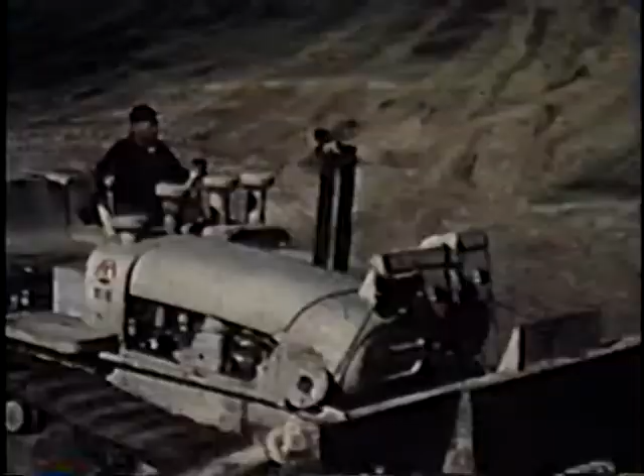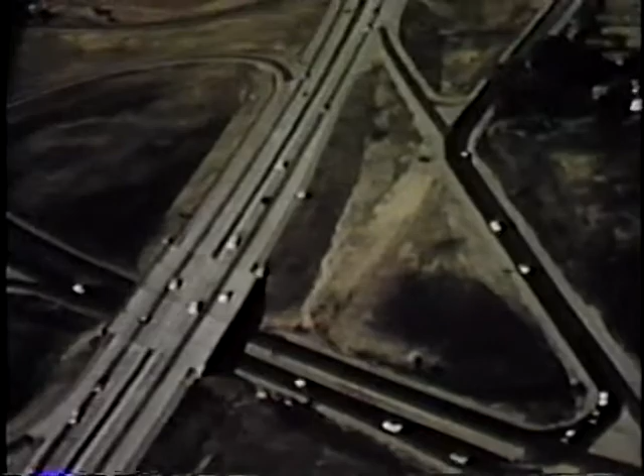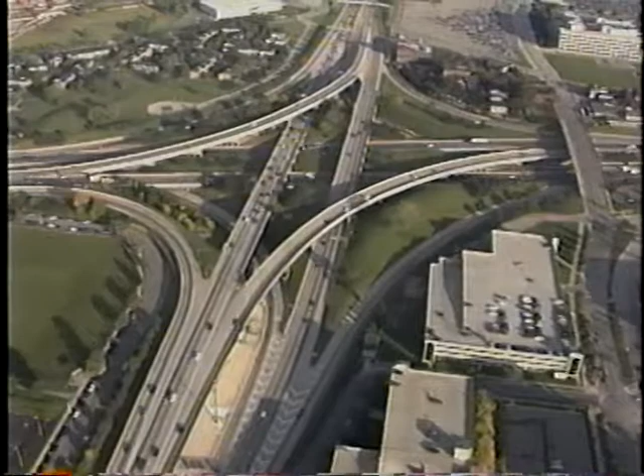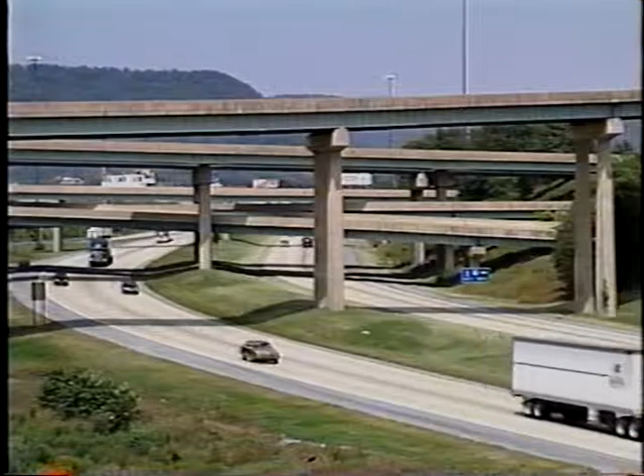It's been a massive undertaking, spanning 40-plus years, costing well over $100 billion, stretching from coast to coast. Ever since President Eisenhower signed the Federal Highway Act in 1956, the focus of transportation funding has been on construction. Our interstate and national highway systems are the largest public works projects in our country's history, achieved through a unique partnership between the states and the federal government, forming the foundation of our transportation infrastructure, the backbone of our nation's economy.

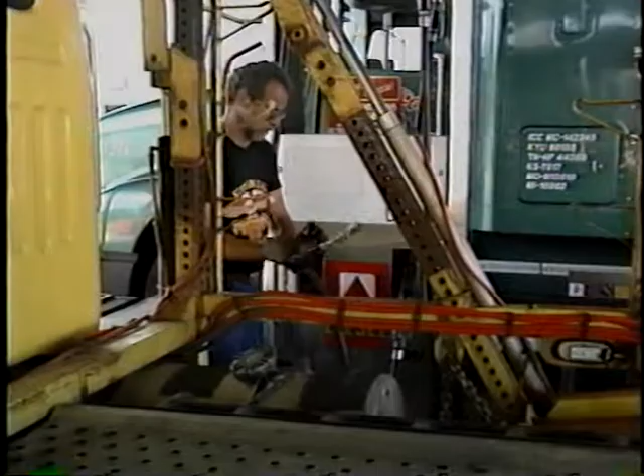Time, traffic, and nature take their tolls on our pavements as the demands on our highway network continue to increase dramatically. At the same time, operating funds have decreased significantly. Revenues simply don't keep pace with needs. In many cases, too, severe reductions in staff contribute to the burden and to the problem. For many years, the resources needed to sufficiently preserve our highway infrastructure have been underfunded. We now have needs that far exceed the resources available.

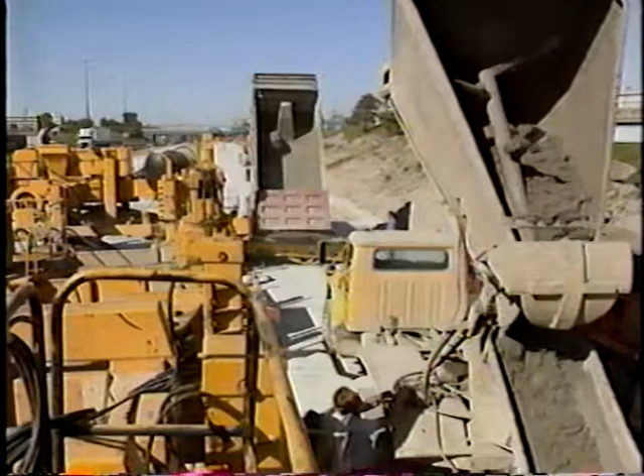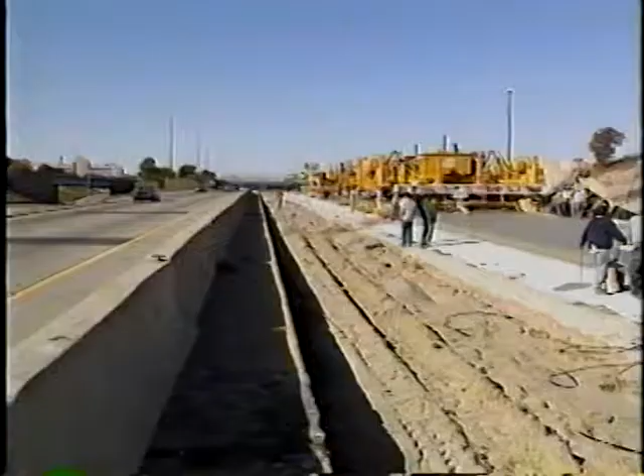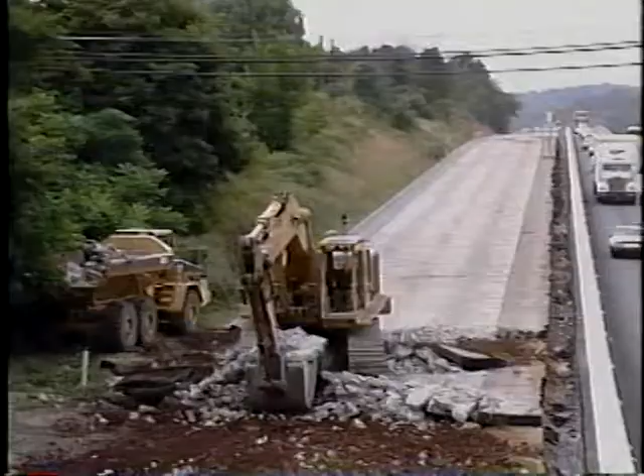The old philosophy of worst first meant directing funds to highways most in need of costly rehabilitation and reconstruction. Preventive maintenance has too often been delayed or neglected entirely, causing minor defects to become major ones, requiring more expensive repairs, disrupting traffic for longer periods of time, adding much higher costs and inconvenience over the life of the pavement. But the old philosophy is shifting to a new paradigm, protecting our pavements through preventive maintenance.

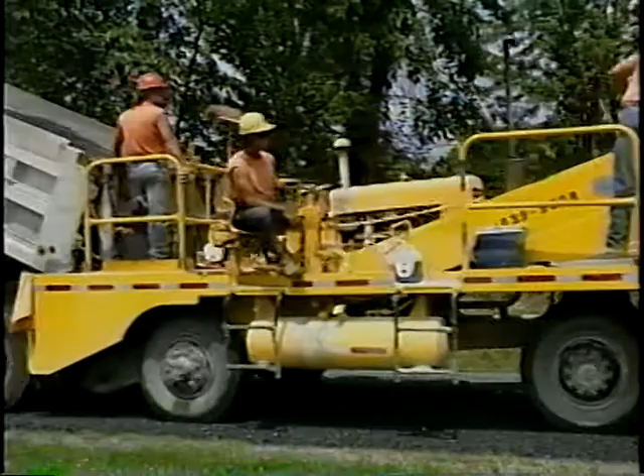One of our prime responsibilities is to maintain the investment we have in our transportation infrastructure. And the best way to do this is through preventative maintenance. Congress and the Federal Highway Administration are committed to the timely preservation of our highway infrastructure. As a result of amendments to the Intermodal Surface Transportation Efficiency Act, strengthened by changes to the National Highway System Bill, federal aid funds are available for cost-effective preventive maintenance programs. Preventive maintenance that extends the useful life of our transportation assets.

Every year we extend the useful life of a pavement or a bridge is a year that we don't have to make that large investment needed to rehabilitate or reconstruct. We can continue to provide a level of service our customers want and even demand with a smaller investment and less disruption to traffic.

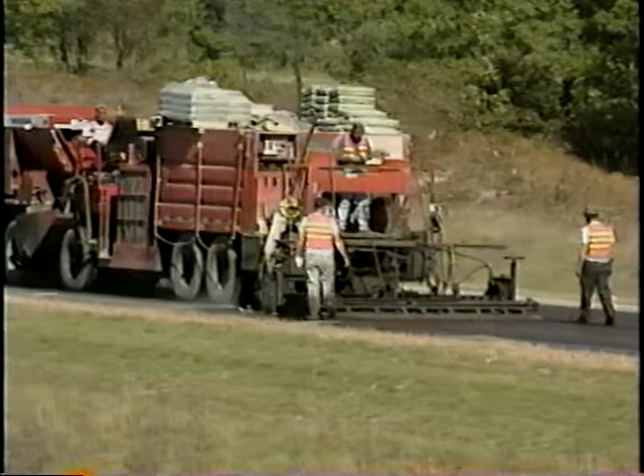Unlike reactive maintenance that works to correct a specific pavement distress, preventive maintenance is proactive, making the most of modern, cost-effective ways to preserve and protect pavement integrity. The goal is to keep the highway network at a given level of quality. And the benefit? Preventive maintenance decreases the rate of deterioration and can delay for years, maybe even indefinitely, costly reconstruction of pavements.

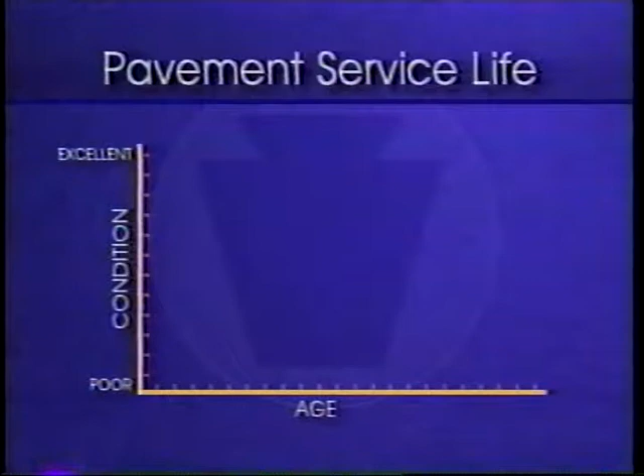Hello, I'm Gary Hoffman, Chief Engineer for the Pennsylvania Department of Transportation. Pavement deterioration of all types can best be represented by this characteristic curve. During the first portion of a pavement's useful life, the pavement is generally smooth and the rate of deterioration is slow. However, as the pavement ages and gets rougher, the daily pounding of heavy vehicles begins to take its toll. Surface cracks develop, water forces its way into these surface cracks, and the pavement deteriorates more rapidly. It is easy for just about anyone to tell when a pavement has reached the end of its useful life, represented on this chart by point B.

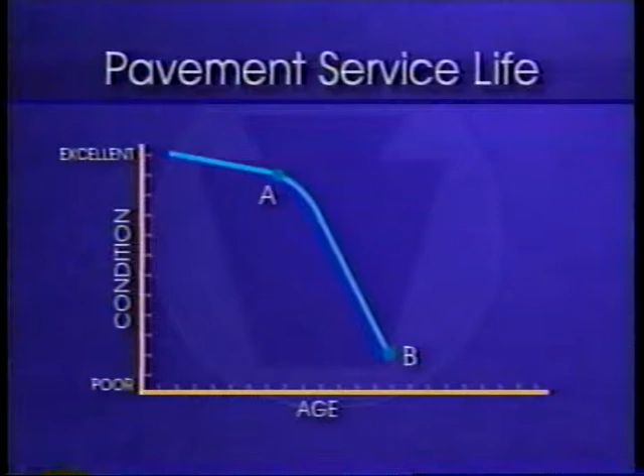The real key to a successful preventive maintenance program lies in an agency's ability to predict when a pavement will reach point A, and then to program sufficient resources to apply the right preventive maintenance treatment. If we can continue on a major portion of our system to extend its life for relatively low cost, another 5 to 10 years, and repeat this, the overall savings in the long run is going to be very, very substantial.

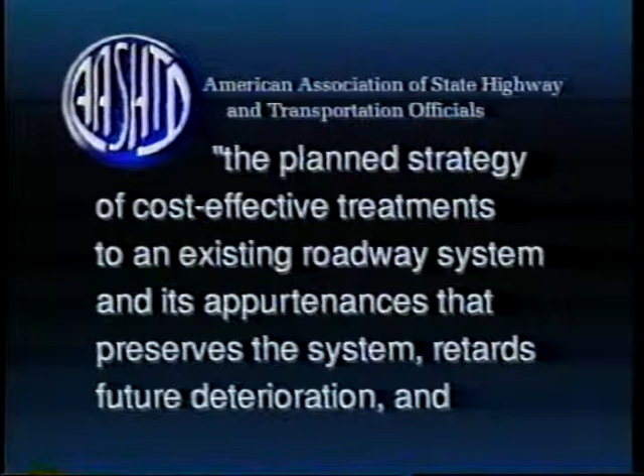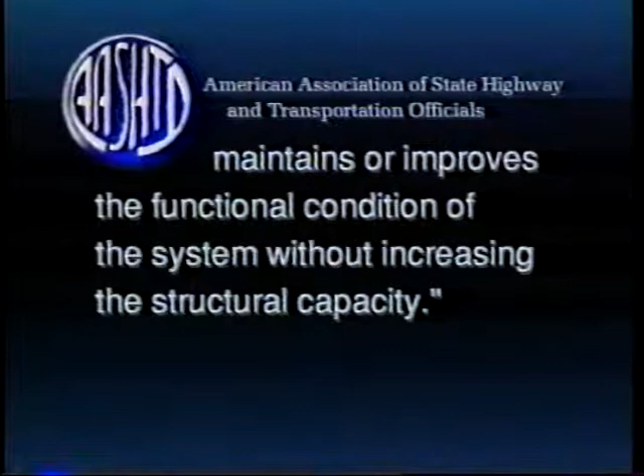The American Association of State Highway and Transportation Officials defines preventive maintenance as the planned strategy of cost-effective treatments to an existing roadway system and its appurtenances that preserves the system, retards future deterioration, and maintains or improves the functional condition of the system without increasing the structural capacity. In essence, it means doing the right treatment to the right road at the right time. And the right time to begin is now.

Given this positive interest by Congress and AASHTO, it is now incumbent on each of us, working collectively, to advance the concepts for timely preventive maintenance. We must focus on the technical aspects of materials, design, and construction practices. Improved planning and dedicated funding strategies are also essential for the successful development of a pavement preservation program.

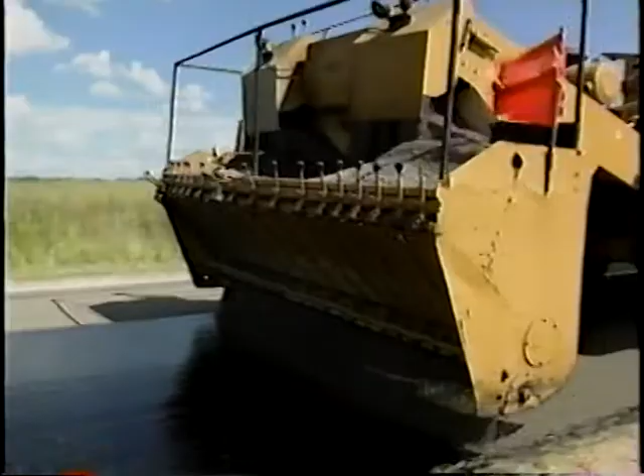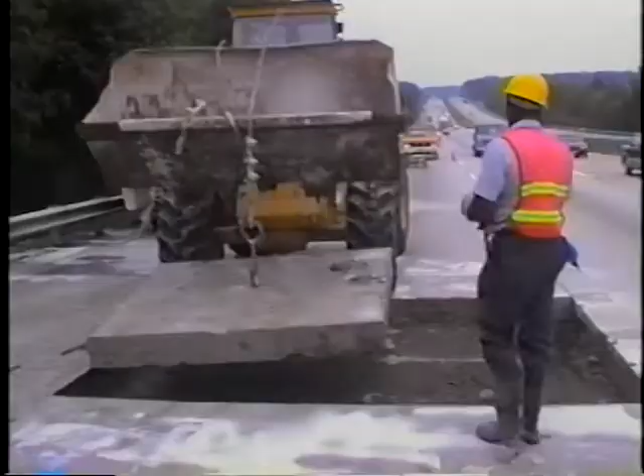Techniques of preventive maintenance range from relatively inexpensive bituminous crack sealing, micro-surfacing, and chip sealing to the more expensive thin asphalt overlays to other techniques on flexible pavements such as in-place recycling of existing asphalt. For rigid pavements, the treatments include full-depth concrete pavement repairs, joint resealing, diamond grinding, and dowel bar retrofits for aging concrete roadways. Using less expensive treatments where appropriate enables spreading the preventive maintenance dollars over more route miles.

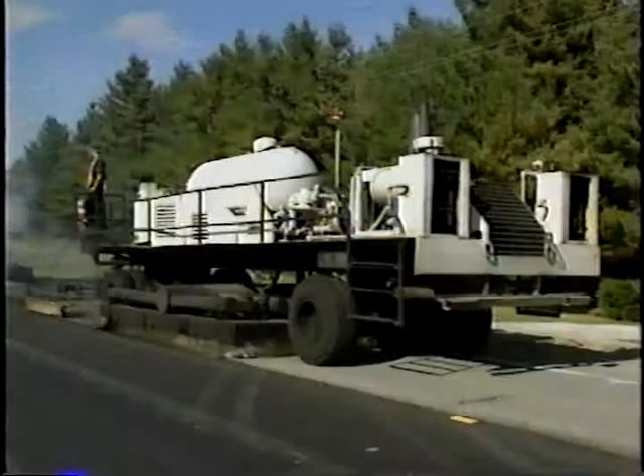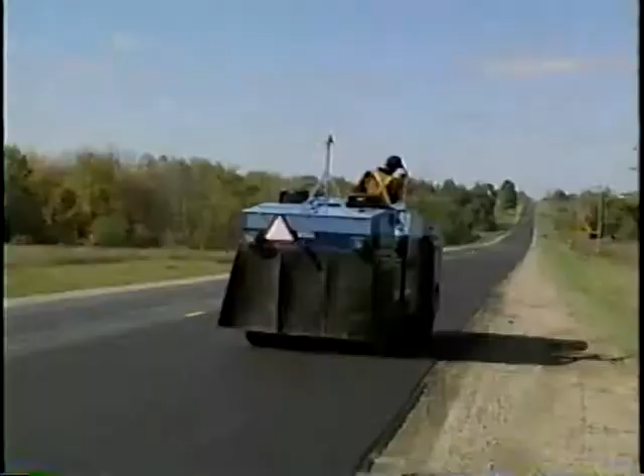Because staff members may not have much knowledge or experience with preventive maintenance methods, a strong commitment to training is essential to the success of the program. People and resources are available to teach personnel about the performance characteristics of the various techniques, how to select pavements that will benefit from preventive treatment, and when in the life of the pavement is the right time to do the job.

For example, if crack sealing will correct the condition, then there's no need to apply a seal coat or thin overlay. To be cost effective, it's important to keep the project as simple as possible. Improved planning is the crux of the preventive maintenance program. Here, too, simplification leads to savings. Projects should be kept very, very simple in a preventative maintenance program.

In Kansas, we let our projects with sketches on 8.5 by 11 sheets of paper prepared by our field people and included in the project proposal. It's been very effective with our contractors since most of these are crack filling, pavement patching, thin overlays, even thicker overlays where we're not changing the cross-section considerably. There's no need to waste a lot of time on fancy plans.

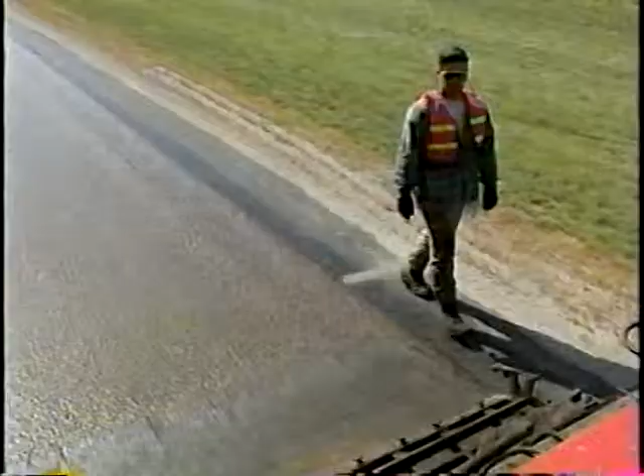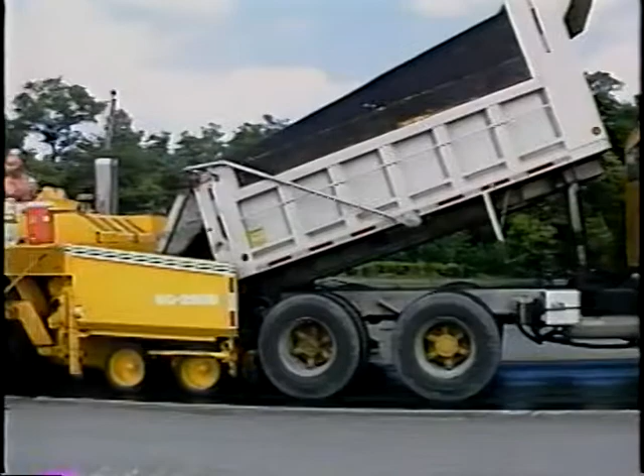Simplified business processes give more responsibility to private contractors for quality control. Preliminary engineering costs, those related to design of the project, are lower. Construction engineering costs are also substantially reduced. But it takes the third element of a preventive maintenance program, dedicated funding, before any long-term savings can be realized. Dedicated funding requires a strong commitment to the philosophy of preventive maintenance, making the choice to preserve relatively new roads with the right treatment at the right time.

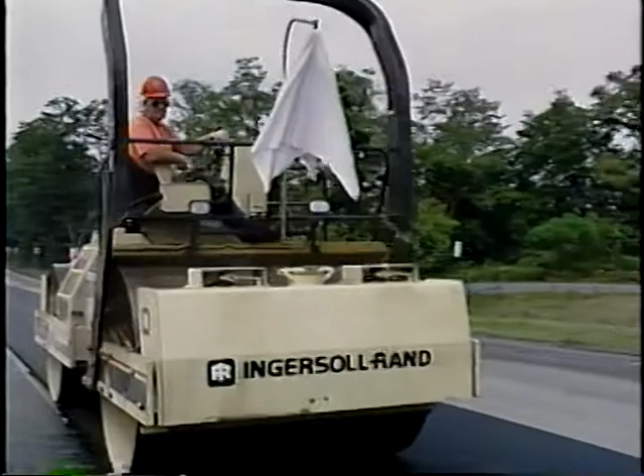One of the problems in getting this program started was with the district engineers. They would say, why are we spending money on a relatively good pavement when we've got terrible pavements that need to be reconstructed? This is a little bit of biting the bullet and spending the money on preventing problems rather than 6 to 8 times more to reconstruct or rehabilitate it after the problem becomes serious.

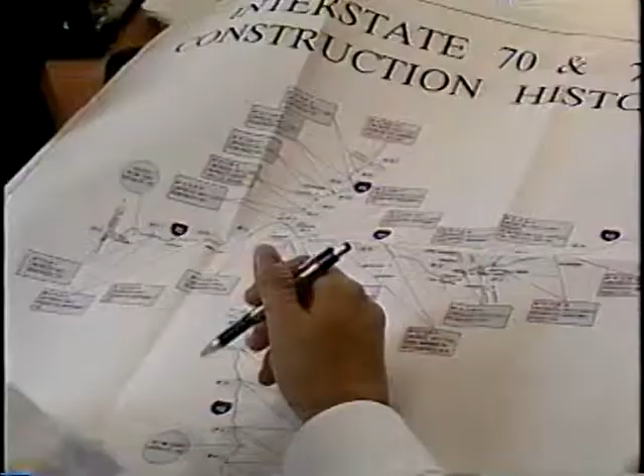It has to have a high level of support from the top management and also a high level of financial support. And it must be substantial and it must be continuous if we're going to preserve the tremendous investment we have in our capital system. Having made the commitment to preserve their pavements, lead states have found that preventive maintenance allows managers to achieve maximum benefit from available funds and to gain greater control over future network conditions and funding requirements. Long-term support and financial commitment are the keys to success.

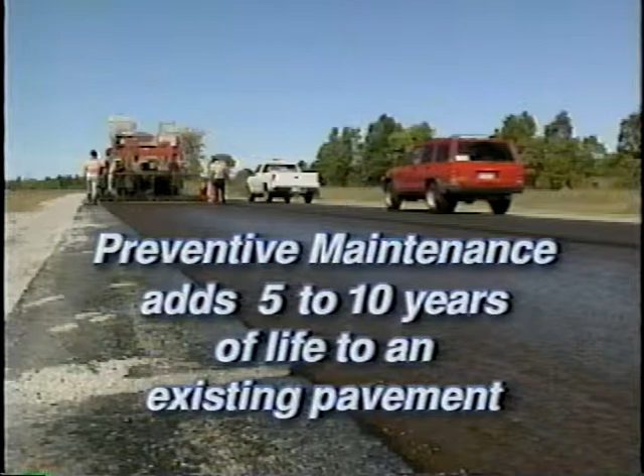Georgia has supported this philosophy since the early 1970s. We spend approximately $70 to $80 million a year on preventative maintenance. Our citizens are reaping the financial benefits of this commitment. Compared to rebuilding a road, studies have shown that for every dollar spent to extend pavement life, a savings of $6 can be realized. Preventive maintenance adds 5 to 10 years of life to an existing pavement. Taking into consideration the cost per year for each year of added life, preventive maintenance projects are at least 6 times more cost-effective than rehabilitation or reconstruction projects.

We found by a recent study that for each dollar we invested in preventive maintenance, the return on extending pavement life was $10. That's a 10-to-1 replacement ratio. Of the original first $70 million that Michigan invested, our return on extending pavement life is about $700 million. This has been very, very important. What that demonstrates is that without spending the first dollar on preventive maintenance, 6 to 10 times the expenditure would be required to reconstruct and rehabilitate to the same pavement surface condition.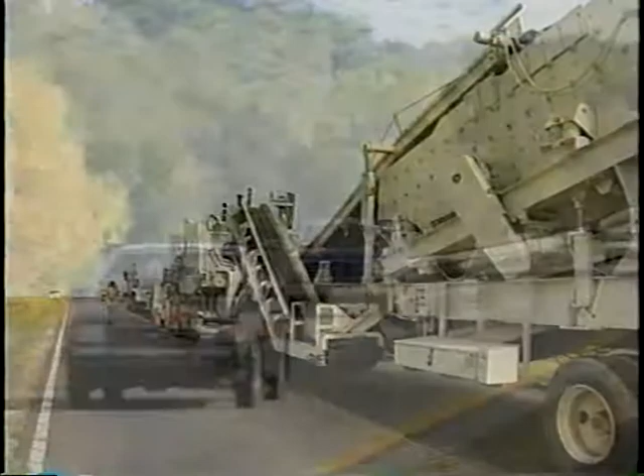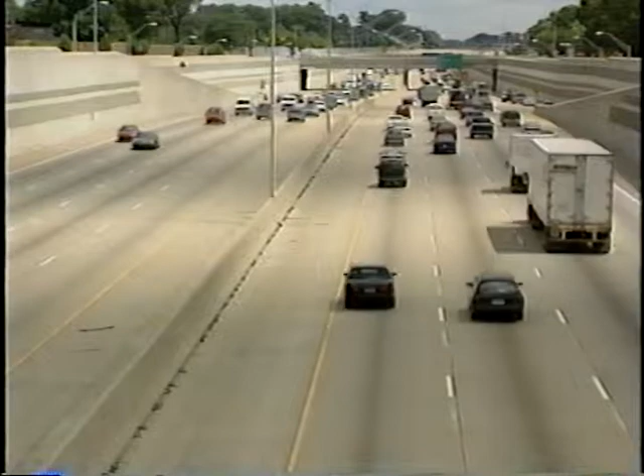The benefits of preventive maintenance accrue not only to highway departments, but more importantly, to highway users. The motoring public and freight carriers enjoy higher pavement quality for an extended period of time, stretching their fuel taxes over the longer term for greater convenience and a smoother ride. The public has come to expect a lot of smooth roads, and that's exactly what we're giving them with our pavement management and preventative maintenance program.

Between 1972 and 1996, there's been a 300% improvement in the ride quality on Georgia's asphalt pavements through preventative maintenance. Since the start of our concrete restoration program 20 years ago, the smoothness of our concrete pavements on the interstates has improved by 200%. It takes the discipline, the focus on it. It takes the support of management. It takes the support of pavement design engineers, the policymakers, legislators, and the public that you're going to focus on preventing the problem. Extending pavement life is key.

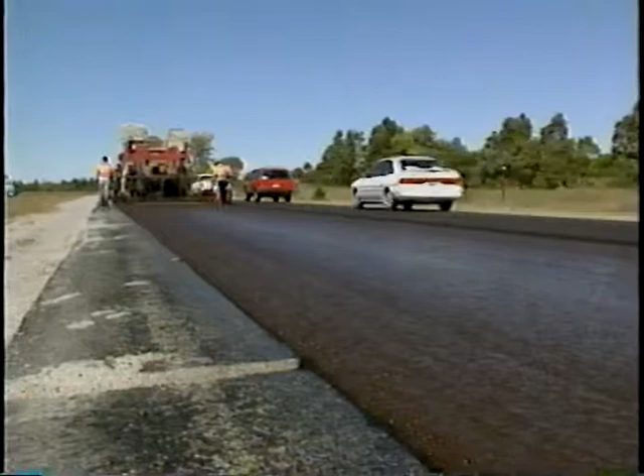Ultimately, preventive maintenance will move Pennsylvania's highway system into the next century. We remain committed to providing the best preventive maintenance procedures to our highways, and with maintenance first as our underlying philosophy, Pennsylvania's highway system indeed has a bright future. Preventive maintenance is a very important tool in the successful management of our highway asset. It is crucial for true system preservation.